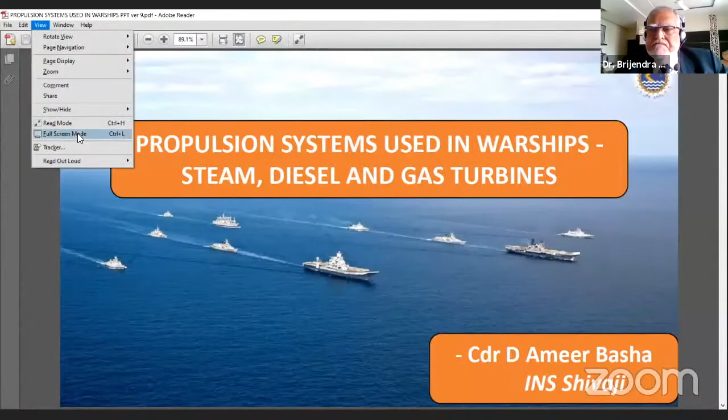Over the next 15 minutes, I'll be giving a brief presentation on propulsion systems used in warships, namely steam, diesel, and gas turbine.

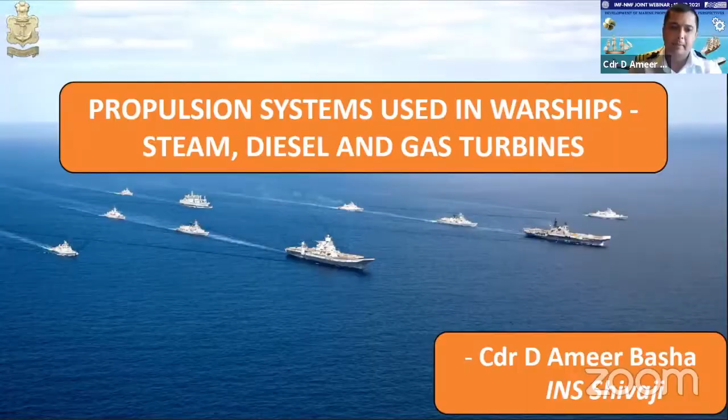The scope of the presentation is as shown on the screen. After giving a brief introduction on the subject, an overview and history of steam, diesel, and gas turbine propulsion in the Indian Navy will be covered prior to concluding the presentation.

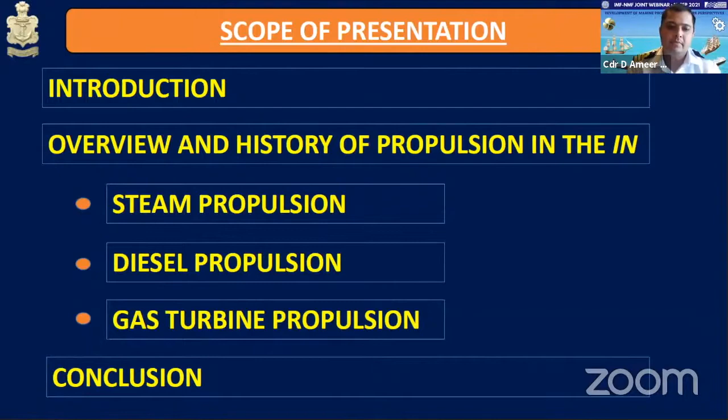With every height scaled in the progress of technology, man has always thirsted for more. The Indian Navy too has witnessed a phenomenal growth in marine engineering technology over the years, from reciprocating steam engines of 1947 to the diesel engines and gas turbines of today.

Needless to say, it has been an eventful journey for the band of marine engineers, a saga of growth and success which has empowered the Indian Navy to share stage with the best in the world.

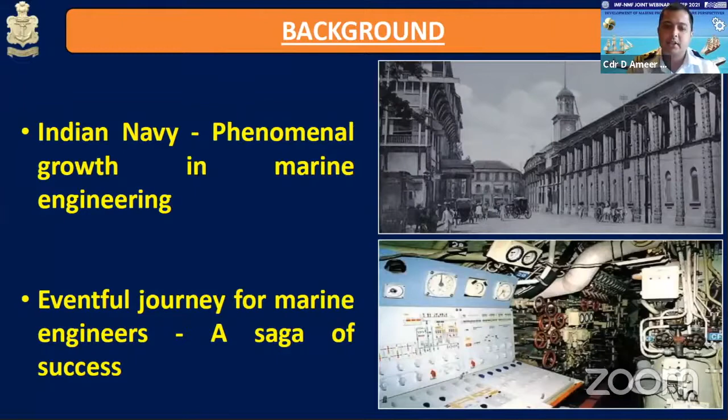Being a peninsular country, India has always had immense interest in the seas, and our maritime traditions span over 4,000 years. Indians have engaged in seaborne trade and cultural exchanges for many centuries. However, when the European interest in our subcontinent began in the 14th century, Indian maritime prowess suffered debilitating setbacks.

The beginning of the 18th century saw the emergence of Kanhoji Angre, admiral of Chhatrapati Shivaji's Maratha fleet, whose name became a legend and whose exploits are written in letters of gold in the annals of naval history. Shivaji was a firm believer in the doctrine Jalameva Yasya Balameva Tasya, he who rules the seas is all powerful, which Kanhoji Angre put to practice.

Shipbuilding shifted from Surat to Bombay in the early 1700s. Lovji Nusserwanjee Wadia, ancestor of a long line of famous Parsi master builders of both naval and commercial ships, selected the site for the naval dockyard in Bombay. This naval dockyard, during the course of the next 100 years, proceeded to build more than 115 war vessels.

The Indian Navy evolved as a war-fighting service from the time the British arrived in India. After 3 centuries of fluctuating fortunes and several changes in nomenclature and roles, the Indian Navy metamorphosed into a composite unit in the mid-1950s. Since independence, the Indian Navy has operated a multitude of vessels and employed a wide range of engines, propulsion, and other systems.

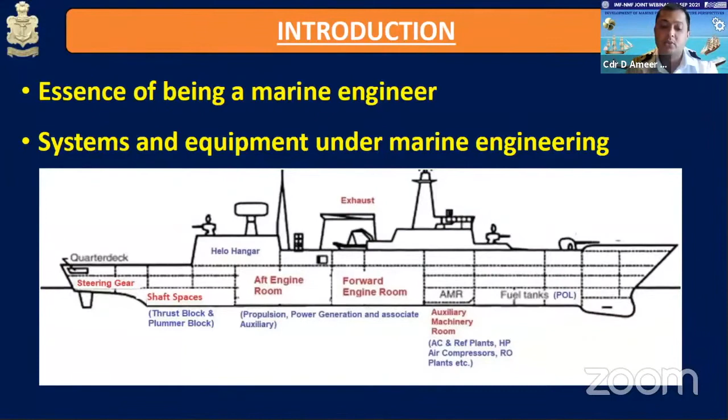Marine steam propulsion. The marine engineering technology that the Indian Navy inherited at the time of our independence was undoubtedly representative of the technology of those times, that is, steam propulsion.

In the context of ship propulsion, the end of the 19th century had heralded the initiation of reciprocating engine technology, which was borrowed from the railways. Steam engines are external combustion engines that perform mechanical work using steam as a working fluid and work on the Rankine cycle.

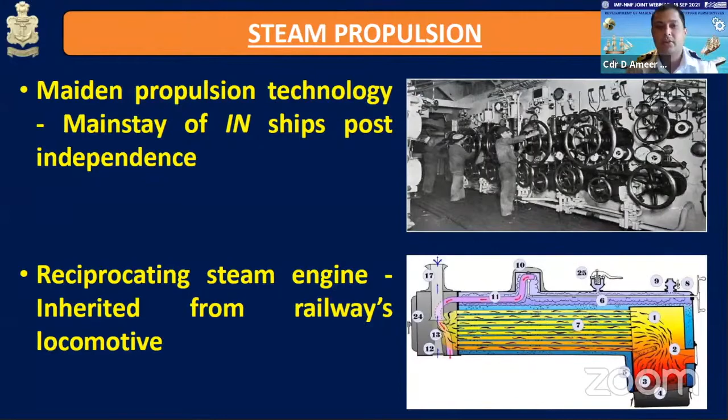Although steam power was not used until the 17th century, scientists had understood its potential for hundreds of years. The aeolipile, invented by the Greeks, used water vapor for motion as early as the 1st century AD. While there was no practical benefit of this device, it was the first example of experiments with steam power.

Greater developments took place with the invention of the first steam boiler in the 17th century. Although it was nothing more than a pressure cooker or a tea kettle, a series of key inventions followed one after another later from this point. In a short span of time, steam power was extensively used in railway locomotives, which led on to its usage for propulsion of ships, propelling them further and faster.

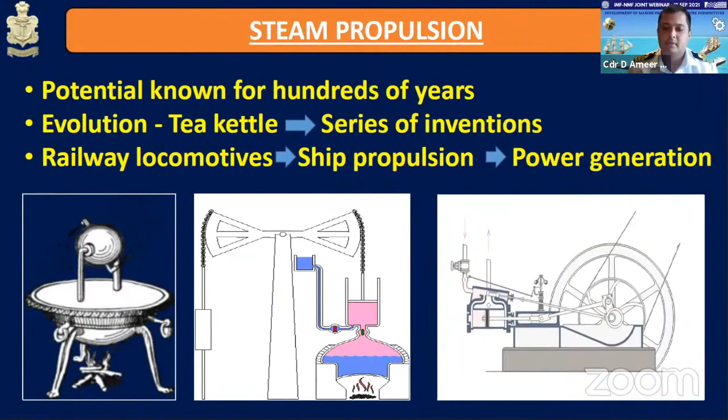Steam powers two types of engines, reciprocating and rotary turbine. The shaft power from each can be directly connected to the propeller or through some form of transmission through a gearbox. Reciprocating steam engines use the force produced by steam pressure to push a piston back and forth inside a cylinder. This pushing force can be transformed by a connecting rod and flywheel into rotational force for work. Reciprocating piston type steam engines were the dominant source of power for all auxiliary machinery on board warships.

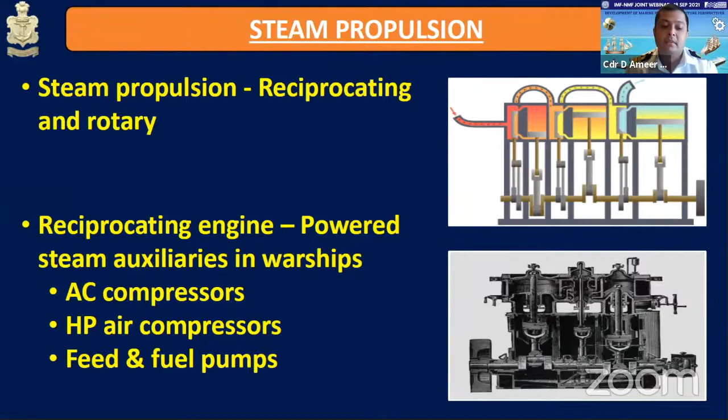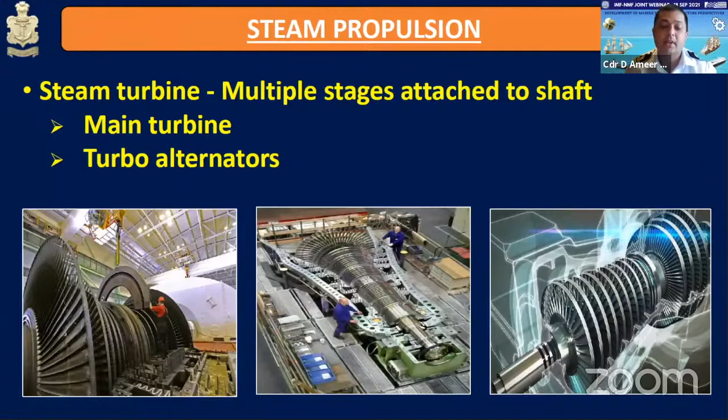A steam turbine is a rotary machine that extracts thermal energy from pressurized steam and uses it for mechanical work. It is a form of heat engine that derives much of its increased thermodynamic efficiency by using multi-stages consisting of blades attached radially to a spinning shaft for expansion of the steam. On steam-propelled Indian naval warships, steam turbines are the dominant source of power for main propulsion and power generation through turbo alternators.

The very first ship that was received from the United Kingdom was the Leander-class light cruiser of the Royal Navy, ex-HMNZS Achilles, commissioned as HMIS Delhi in July 1948, which was powered from the steam generated in 4 Admiralty 3-drum boilers. On 26 Jan 1950, with India becoming a republic, the Royal Indian Navy was renamed the Indian Navy, and the steam-propelled acquisitions included ex-Godavari, Gomati, Ganga, Khukri, Kirpan, Kuthar, Trishul, Talwar, and Mysore.

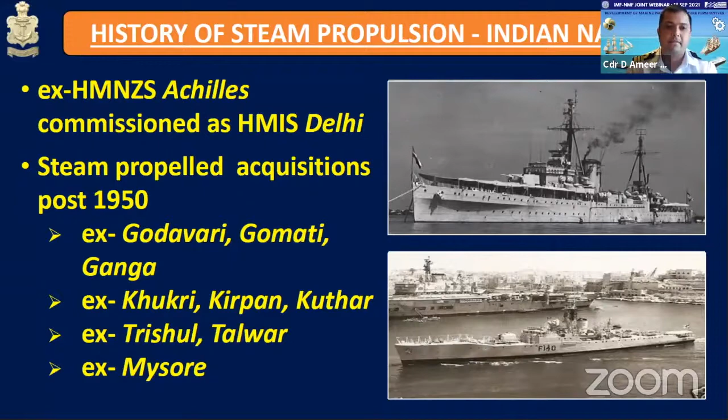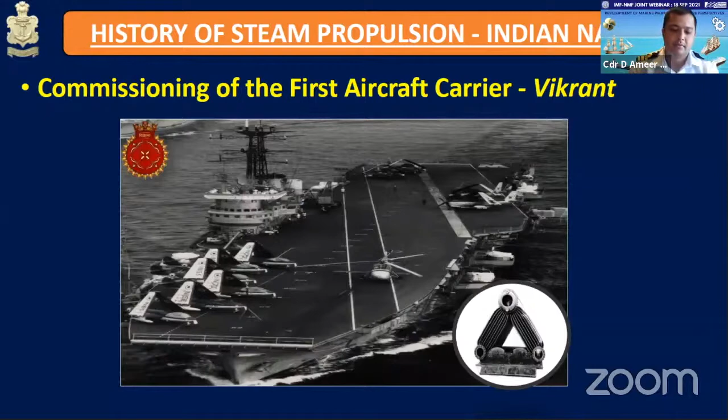As part of indigenous warship construction from 1970s to 2000, the steam propulsion plant was the mainstay of Indian Navy. Ships of the Nilgiri class, built at the Mazgaon docks from 1970s to 80s, were equipped with Y160 steam propulsion plants, consisting of 2 Babcock-Wilcox 2-drum integral short furnace boilers. This propulsion plant design was continued on Godavari and Brahmaputra classes of ships.

Y160 steam propulsion plants marked the beginning of indigenization and self-reliance, wherein the Boiler Erection Fabrication Center at Naval Dockyard, Bombay, developed the capability of erecting these boilers for main propulsion in-house.

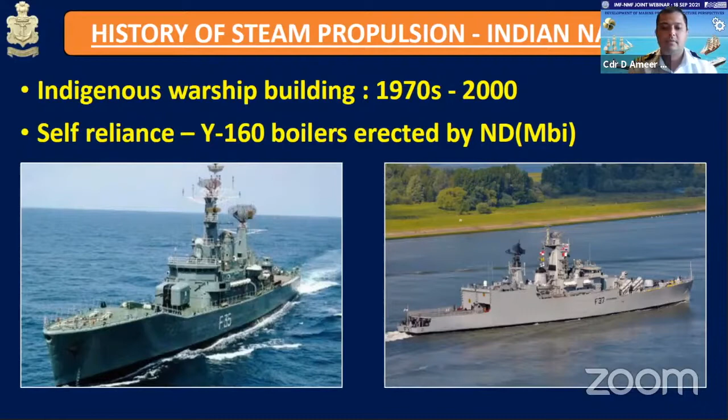The Indian Navy acquired its second aircraft carrier, INS Viraat, ex-HMS Hermes, from the Royal Navy, and after an extensive refit, commissioned it in 1987. Standard Admiralty 3-drum boilers propelled this 23,900-ton warship, which served the nation till 2017.

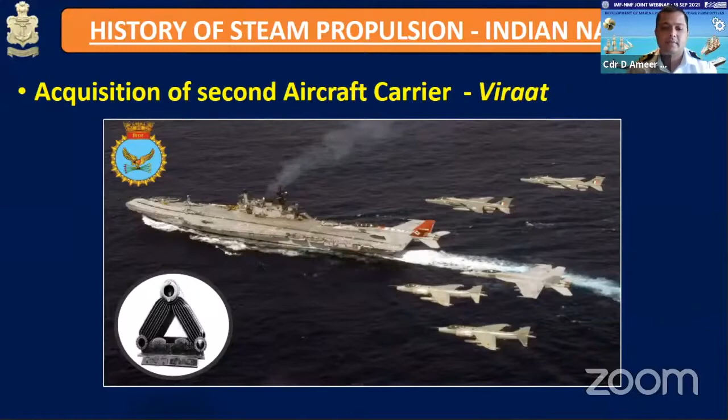Steam-propelled Indian naval ships of today include the aircraft carrier Vikramaditya, landing platform dock Jalashwa, and frigates of Godavari and Brahmaputra class. INS Vikramaditya is powered by 8 new generation Russian boilers, which produce a total power of 180,000 HP, driving 4 huge propellers. Each boiler generates 100 TPH of steam at a very high pressure of 64 bar against 30 bar in other existing steamships, including Godavari, Brahmaputra classes, and INS Jalashwa, fitted with indigenous and Western origin boilers respectively.

Indian Navy has thus developed expertise in operating indigenous, Russian, and Western origin boilers and would continue to operate them for at least next 30 years.

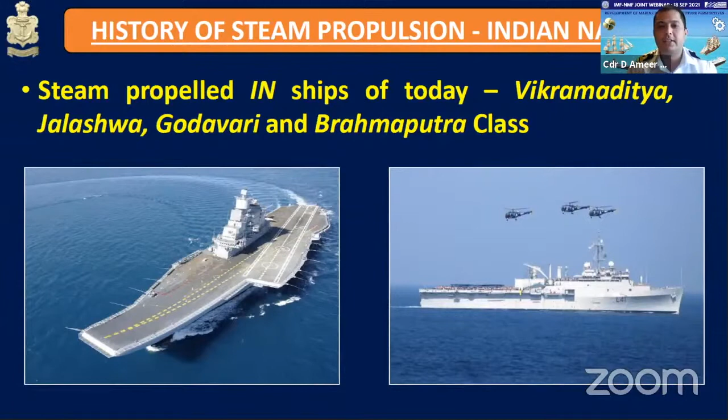Diesel propulsion. The prime consideration for shifting to diesel propulsion was the reduced size of the diesel engine, which resulted in an optimum power to weight ratio. The diesel engine is a compression ignition engine and has the highest thermal efficiency amongst any practical internal or external combustion engine due to its very high compression ratio.

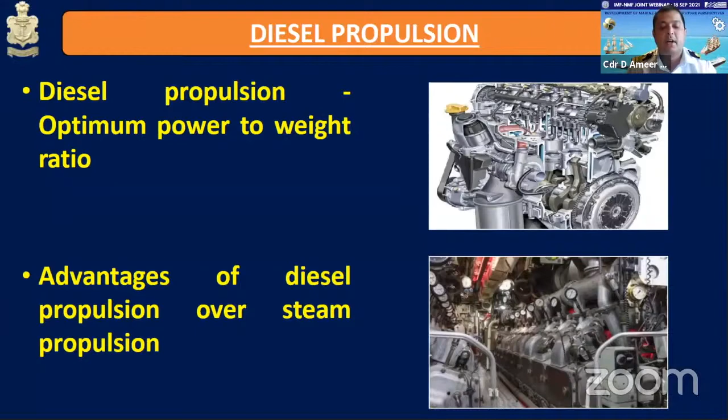Diesel engines may be designed as either two-stroke or four-stroke engines. They were originally used as a more efficient replacement for stationary steam engines. Since the 1910s, they have been used in submarines and ships. This marine propulsion technology coexisted with the steam technology that the Indian Navy inherited at the time of our independence.

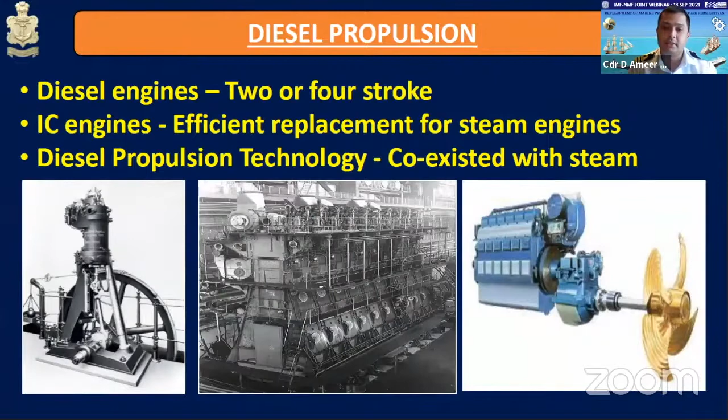Diesel-propelled acquisitions of Republic India included light tanker ship ex-Shakti, inshore minesweepers ex-Bassein and Bimlipatnam, coastal minesweepers ex-Karwar, Cannanore, Cuddalore, and Kakinada, anti-aircraft frigates ex-Brahmaputra, Beas, and Betwa, and seaward defense boats ex-Subhadra, Suvarna, and Sukanya.

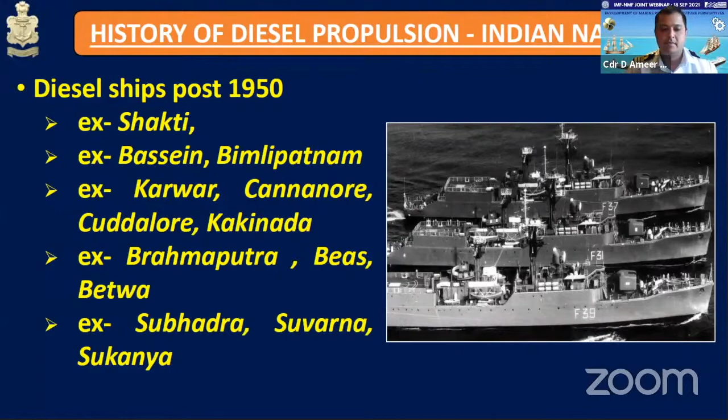The need for more power in less weight and space was always the main thrust of any propulsion package design. As a result, lightweight aluminum alloy radial engines of sophisticated and complex design used in aviation industry were marinized by the Russians and adapted for OSA class fast attack missile boats. These ships acquired by the Indian Navy became legendary when they were deployed with strategic brilliance to strike a lethal blow to the enemy's harbor in the 1971 war.

These compact aeroderivative high-speed engines called for specialized operator expertise and maintenance ability. Missile Boat Engine Repair Center of Naval Dockyard, Bombay, and the original equipment manufacturers jointly worked to make the operations more user-friendly. As a result, the radial engines became a major success story in the Navy.

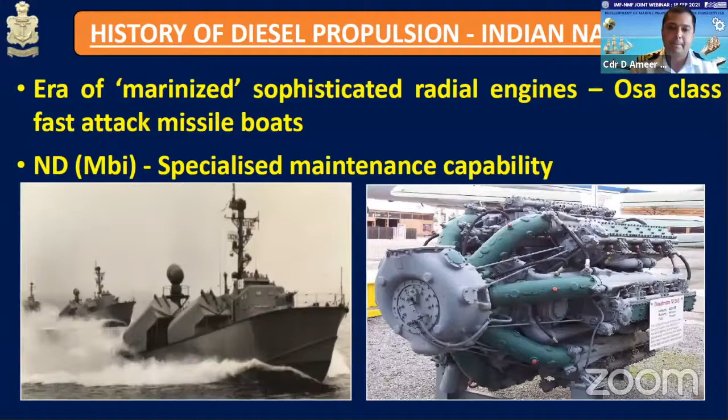Addition of new generation diesel engines to the Indian naval fleet happened with the acquisition of 5 Petya class of ships in 1968. The ships were fitted with unique Russian two-stroke opposed piston diesel engines. They worked on a two-stroke cycle and had 4 crankshafts. Following Petyas, Vijaydurg class of diesel propelled ships were acquired commencing 1976 with primary intention of coastal patrol and defense.

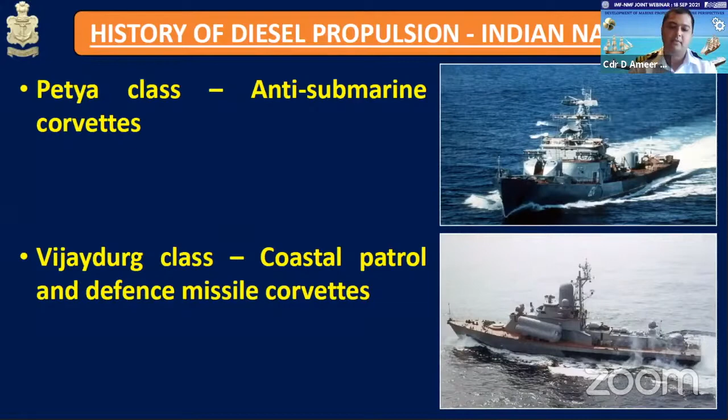In the 80s, when the Indian Navy was growing, the demand for more platforms to meet diverse operational requirements also grew. Diesel engines of different makes and designs found their way into the Navy during this period. The Pielstick PA series of diesels, taken up by Kirloskar Oil Engines Limited for indigenous production, were selected for the corvettes of the Indian Navy and represented a simple yet modern design.

The high-speed MTU engines, with a compact and lightweight design, have always remained favorite for small crafts. The large size, slow-speed MAN design diesels of the fleet tankers were a merchant marine type of engine introduced into the Navy for the first time.

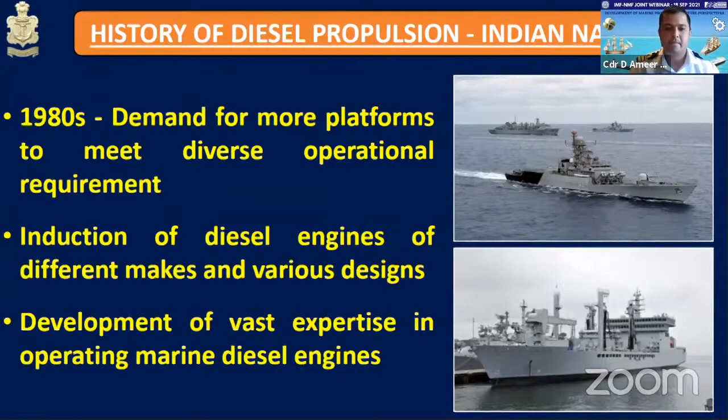Gas turbine propulsion.

A gas turbine, also called a combustion turbine, is a type of continuous internal combustion engine. The main elements common to all gas turbine engines are an upstream rotating gas compressor, a combustor, also known as combustion chamber, and a downstream turbine on the same shaft as the compressor. The basic operation of the gas turbine follows the Brayton cycle with air as the working fluid.

Atmospheric air flows through the compressor that brings it to a higher pressure. Energy is then added by spraying fuel into it and igniting it, so that the combustion generates a high temperature flow. This high temperature pressurized flow is repurposed for external work, such as rotating a second independent turbine known as a power turbine that is connected to a propeller.

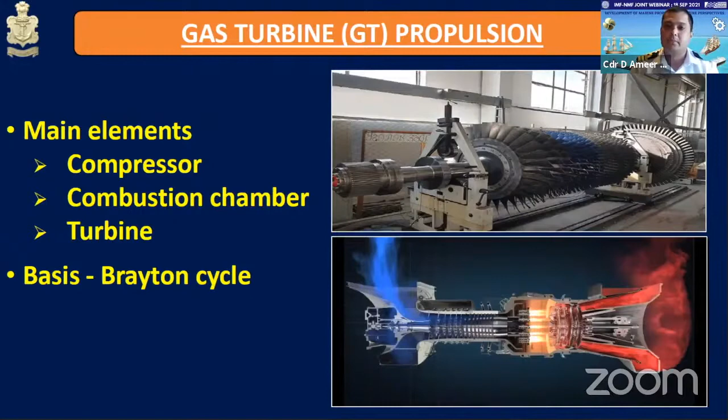Fitted on board the erstwhile Kamortas, the gas turbine, a radically new propulsion concept for the Indian Navy, was introduced in the 60s. The two M2 bay gas turbines, one each on the outer shafts, gave the ship awesome boost and propulsive power.

The induction of GTs received renewed thrust with the arrival of M3E Russian GTs on board Rajput class of ships in the 1980s. M3 GTs were rugged and reliable engineering equipment. In 1987, the Veer class of ships, 1241 REs, were inducted using M15E Russian propulsion systems. This GT was reversible, and the unique layout showed how a GT could be adapted in a confined space of a small vessel.

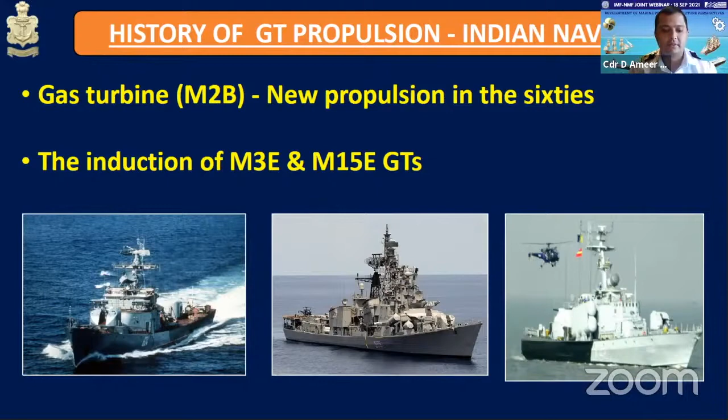The idea of creating an in-house composite and self-contained marine gas turbine overhaul facility, manned entirely by service personnel, to cater for gas turbines and gas turbine generators and future acquisitions, was conceived in the early 80s. The first overhauled gas turbine, M3E, rolled out of the portals of this unique facility in August 1995 and was installed on board INS Ranveer.

The first indigenously overhauled gas turbine generator prime mover underwent successful testbed trials in December 1996. This establishment, which was commissioned as Indian Naval Ship Eksila on 26 August 2000, today has a cumulative experience of overhauling more than 66 gas turbines and gas turbine generators.

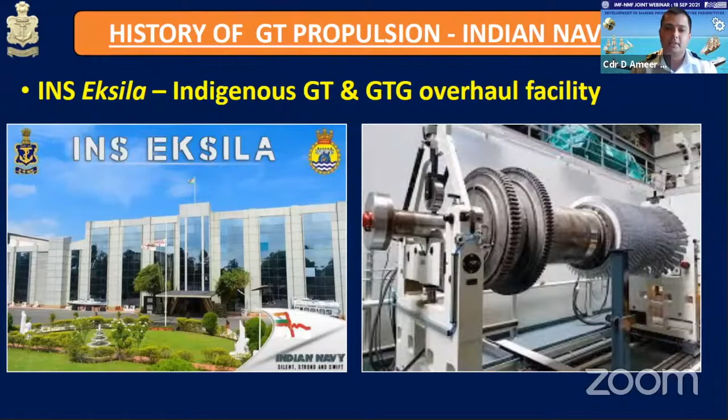Another remarkable achievement during the 90s was the indigenously designed and built state-of-the-art destroyers, the Delhi class of ships, which were constructed at Mazgaon Dock Limited and were the first gas turbine propelled ships designed by the Indian Navy.

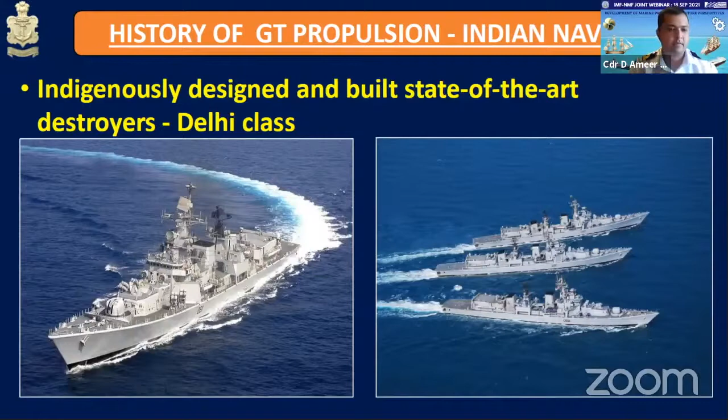A remarkable technology assimilation has taken place in the Indian Navy in a reasonably short span of one generation of marine engineer officers in the gas turbine field. The expertise and confidence in maintenance and operation of gas turbines today in the Indian Navy is at par with the most advanced navies. Today, the GT are the front runner of main propulsion and power generation on major Indian naval ships.

Although certain important gas turbine technology areas, such as blade design, gas flow path, matching of spool, etc., are yet to be mastered in India, and indigenous industrial support in this area of technology is minimal, a commendable task has been performed by the Navy to build up its own expertise on maintenance and operation.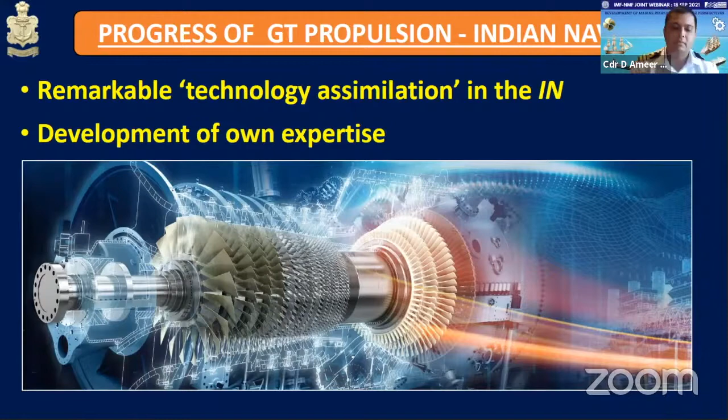Commander Basha, if you could expedite, please. Yes.

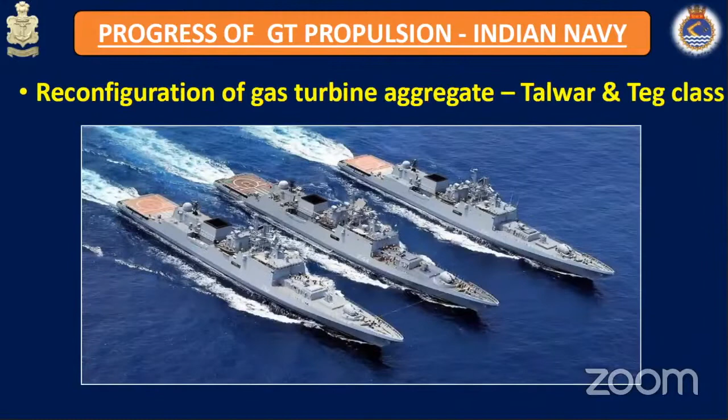The Project 17 frigates, the Indian Navy's Shivalik class. These ships have a combined diesel or gas turbine propulsion plant featuring two LM2500 marine gas turbines and two Kirloskar-Pielstick diesel engines.

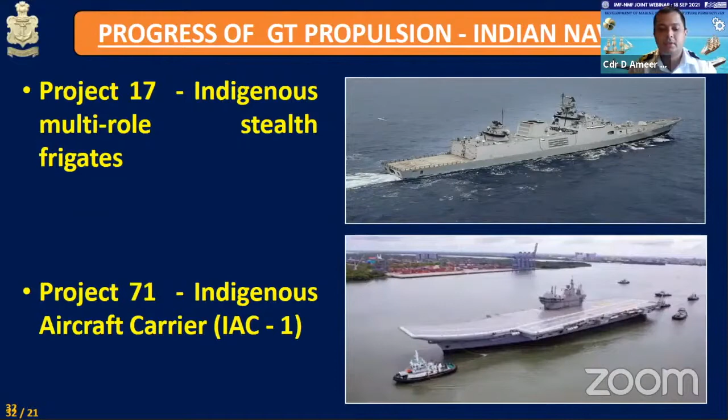Construction of the new indigenous aircraft carrier has been completed and the ship is under trials at Cochin Shipyard Limited. This vessel is powered by four HAL LM2500 gas turbines driving two shafts. It is a remarkable platform and an extremely challenging experience for the next generation of marine engineer officers of the Indian Navy.

The technological journey for the marine engineers effectively started from the first cruiser INS Delhi, a battle-worn ship handed on from the Royal Navy. The road traveled by the marine engineers from the pre-war machineries to today's state-of-the-art ship has not been an easy one.

Technologies that the marine engineers encountered over the years have been diverse in type and source, and the diversity has also truly been in extremes. Managing such diversity, especially in the absence of any active support from the Indian industry, has posed immense challenges. It is to the credit of the Indian Navy's marine engineers that with imagination, ingenuity, instinct, and improvisation, service and availability of the equipment and systems were consistently ensured.

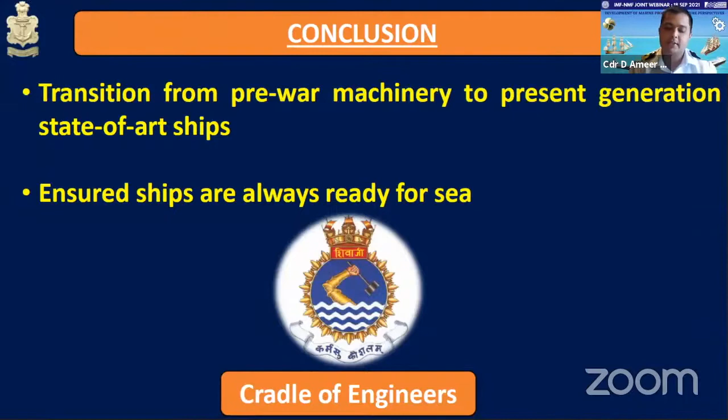We can say with pride that barring the rarest of rare occasions, the main engines have always been ready for sea.

With this, I'm finished with my presentation, sir. The house is now open for discussion.

Thank you very much, Commander Basha. An excellent presentation, and it's so very enlightening, especially for the people who are from the merchant marine here. It is so nice to see the initiatives taken by the Indian Navy in indigenization and the use of alternate materials, those kind of things. So wonderful to see various developments and the variety of propulsion mechanisms and systems available, and the kind of experience provided to the marine engineers in Indian Navy. So compliments to you, Commander Basha, and I don't see any questions.

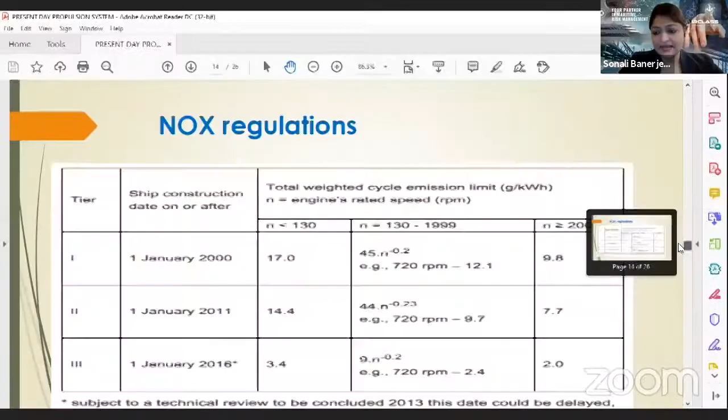So I would be discussing what criteria actually get into the selection of a propulsion system. As already spoken about, it is not just about the successful movement of the ship from point A to point B, but there is far more which goes into the selection of the prime mover for a ship, and the kind of propeller and drive unit we are going to have. First, navigation safety and the technical feasibility associated with that choice. Reliability, of course - when we make a choice of a marine propulsion system, the prime mover, there are huge commercials at stake, and reliability with respect to taking the cargo from point A to point B and meeting environmental regulations is one of the key challenges. Cost effectiveness, that goes without saying - economic viability is very important.

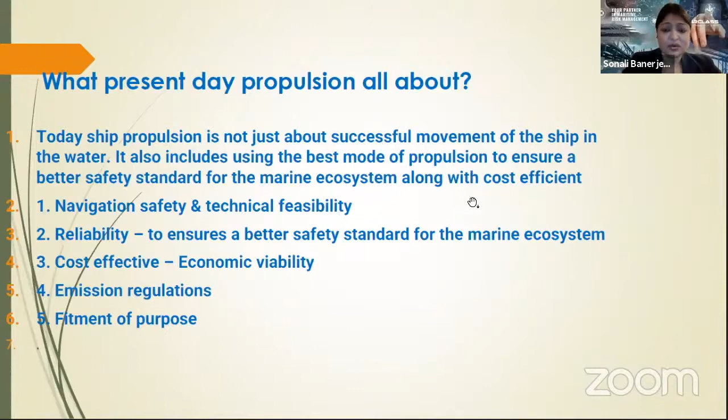Then we have the emission regulations and the fitment of purpose. Some vessels, for example a dynamic positioning vessel, require fine tuning with respect to maneuverability, because a lot of offshore structures have divers working at the bottom of those structures in the offshore. So this fine tuning with respect to navigability is very important, and those kinds of things go into the fitment of purpose.

We also have a category of floating vessels that are non-propelled, which would typically be like barges, pontoons, accommodation barges, which accommodate special personnel working at particular sites, say pipeline units or offshore structures, and also engaged in research, oceanography, etc.

So the topic today would be primarily discussing the propelled ships. The propulsion system would depend on the type of ship and the trade they are engaged in. They can broadly be classified into four categories: conventional big oil tankers, bulk carriers, container ships and other cargo ships; LNG ships; offshore supply vessels and vessels dealing in offshore operations; and small commercial vessels.

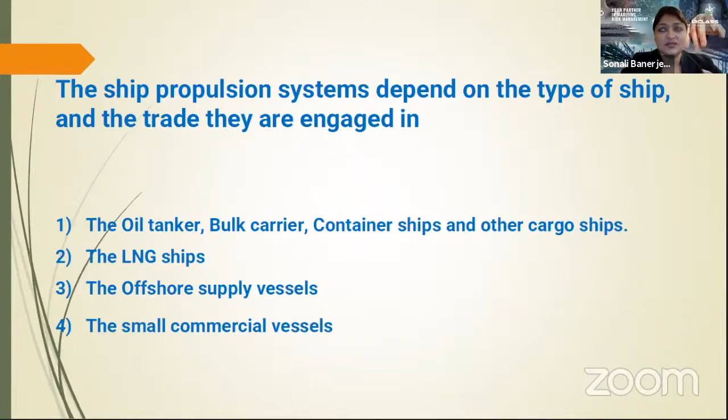Coming to the first one, the oil tankers, bulk carriers, and container ships - the main criteria for choosing this kind of propulsion system is that they should be able to carry huge volumes of cargo, propel at a speed of say 12 to 15 knots, and the container ships may go up to 24 to 30 knots. A higher power by weight ratio is needed.

By power by weight ratio I mean the power that is being generated versus the space and weight being carried. Because the heavier the engine gets, that makes up for some volume of cargo that has to be taken off. So it's important to have a higher power by weight ratio, and also the number of power strokes per complete cycle, meaning the choice of a 4-stroke or 2-stroke engine for these kinds of ships.

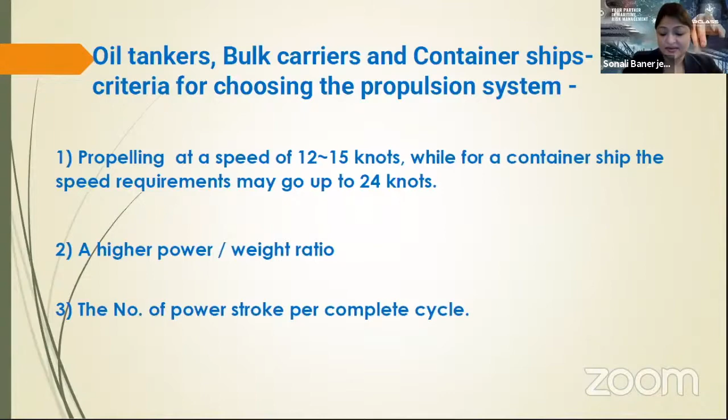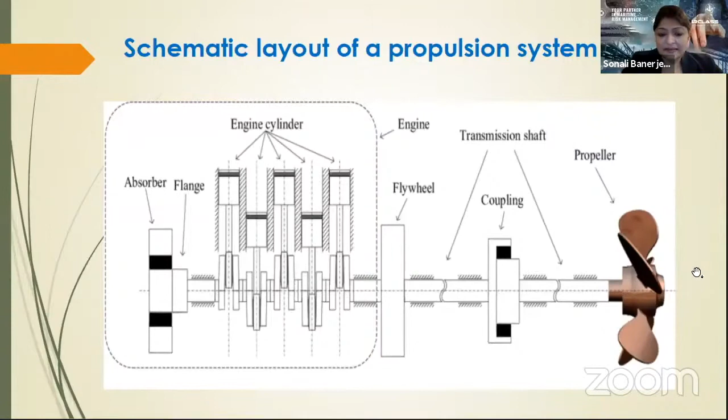So the conventional system for huge ships would be a long stroke or super long stroke, slow speed, 2-stroke marine diesel engine. Most modern ships use a reciprocating diesel engine as the prime mover due to their operational simplicity, robustness, fuel economy, and ease of maintenance.

The rotating crankshaft can be directly coupled to the propeller with slow speed engines, or sometimes with the help of a reduction gear for medium or high speed engines, and by an alternator in the case of diesel electric propulsion units. Intelligent engines have already been covered vastly, so I will not be discussing much upon that.

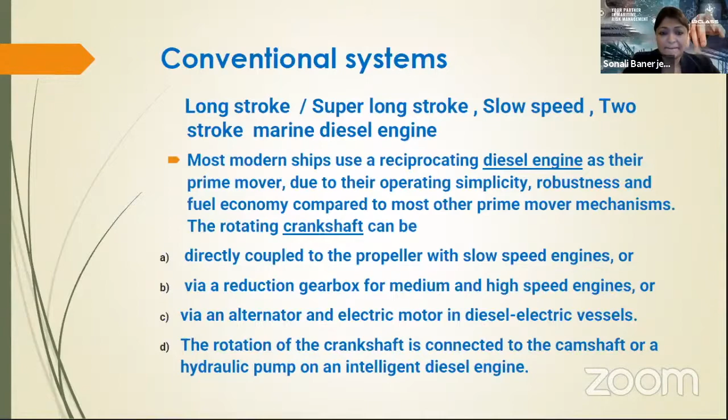Moving on to the next category of ships, towards the evolution of the LNG ships. One of the greatest challenges faced by people operating LNG ships was the complexity of cargo boil-off and how to manage it. This was the grounds on which the evolution of LNG ships developed.

Boil-off was initially used in a boiler to generate steam, which would drive the main propulsion via a steam engine or steam turbine. However, the efficiency for such systems was not very high, so there was a constant need for this technology to keep evolving. It improved with ultra superheated steam turbines giving better economy and efficiency, and thereafter came today's hero: the dual fuel technologies.

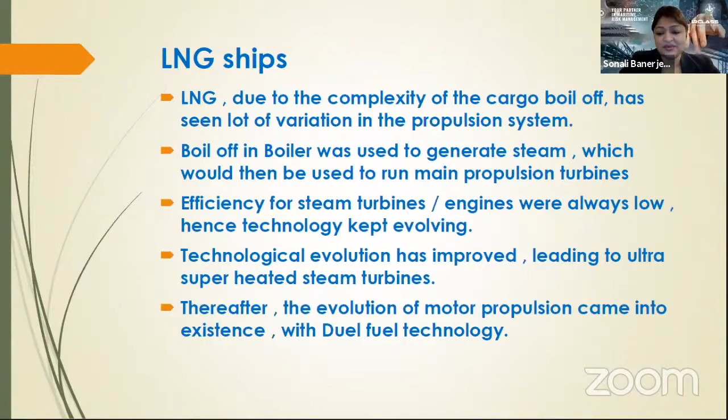A simple schematic layout of a dual fuel engine on an LNG ship: these are the gensets, the red line depicts distillate fuel, and TFDEs are also being used, meaning heavy oil, distillate oil, and boil-off from the cargo plant. This would typically be a cargo tank, and the boil-off gas comes here. There's a compressor, then a heater, and with the help of this heater, the boil-off gas is injected along with the distillate fuel and burnt here. Then we have this genset connecting power to the main bus bar.

Similarly, the same is used in a boiler, which would in turn drive the turbine, which can be used with the help of a fixed pitch or controlled pitch propeller.

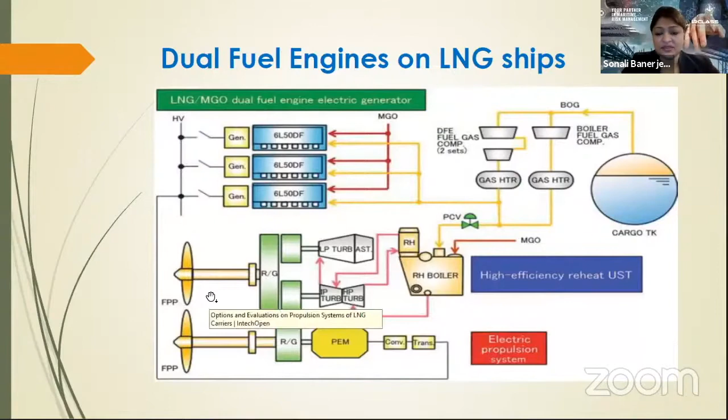That's exactly what we saw: the dual fuel diesel electric propulsion. These ships were fitted with a partial reliquefaction plant, and the generators were capable of operating on dual fuel as well as HFO. The ones using HFO, distillate fuel, and boil-off gas would be called the TFDE, that is the tri-fuel diesel electric propulsion.

The generated power would then be utilized to drive a big synchronous motor, which would generally drive a CPP, because the power requirement can be varied with the help of a controlled pitch propeller, and in some cases fixed pitch propellers.

Thereafter, the MEGI engines of MAN B&W combined the main engine to be able to burn fuel as well as boil-off cargo. However, the big constraint faced in this case was that these engines required high capacity boosters, almost to the extent of 350 bar pressure, to be injected into the engines.

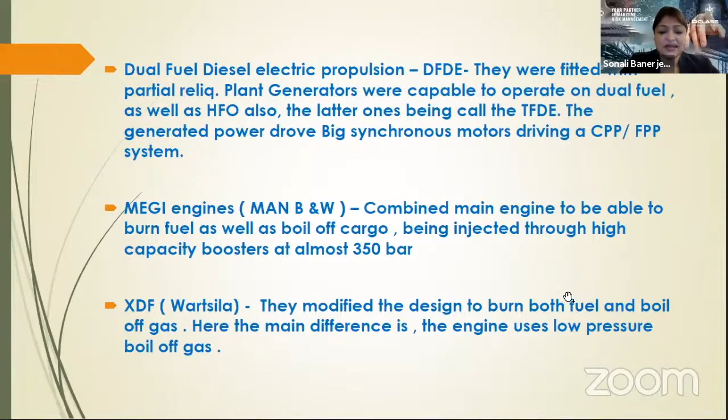This was simplified with another version, the XDF from Wärtsilä, where they modified the design to burn both fuel and boil-off gas. However, they required a lower pressure boil-off gas injection, so the industry opinion has been that this is generally getting more popular.

Coming next, I would be discussing very briefly the schematic layout of a diesel electric propulsion system. These kinds of systems are generally seen in offshore vessels and cruise ships.

As mentioned earlier, while operating in offshore structures, fine tuning is very important because the dynamic position vessel's ability to hold position is critical under various wind and weather conditions. For cruise ships, these are a popular choice because they generally have less noise and vibration, and the comfort of passengers is a big criteria in choosing the propulsion system.

Here they would have huge gensets generating big power connected to the main bus bar, and from this bus bar they would drive big motors which drive the propulsion unit, thruster units, stern thruster, bow thruster, whatever combination is required for, say, dynamic positioning.

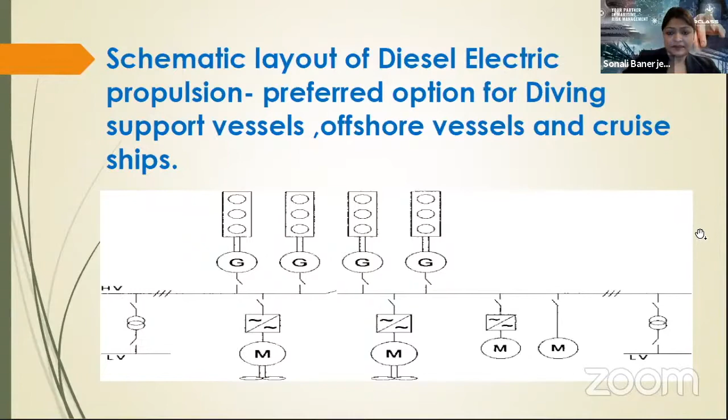Other commercial vessels have many combinations, but a few I've included here: water jet propulsions, which are used in small high-speed crafts, and directional propellers or Z-pellers, as they're popularly called, used by anchor handling tugs or tugs. In this case, the propeller is able to move from one direction to the other, and accordingly the purpose of the rudder is also met out in this manner.

Thruster units for high precision offshore operations, as for example diving support vessels, and coming technologies in renewable energy and wind power.

So finally, we are eventually aiming for a situation where we may be able to become fuel free and are able to utilize renewable energy and wind power.

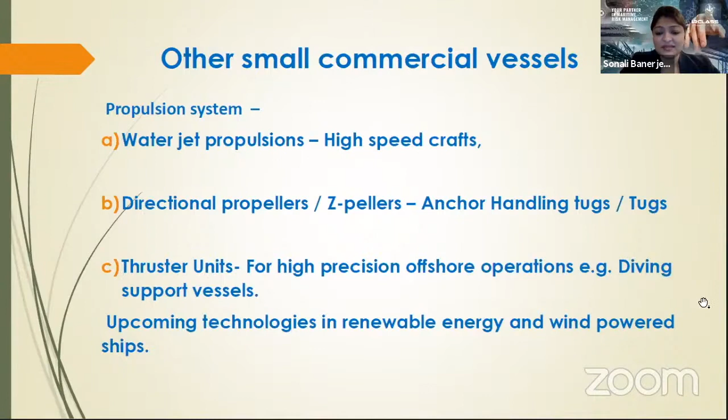Next, we come to the environmental regulations. Primary concerns that we have when we talk of environmental regulations are the NOx regulations, the SOx, and the carbon emissions and particulate matters.

Coming to tier 3, this would be applicable on ships which are in emission controlled areas.

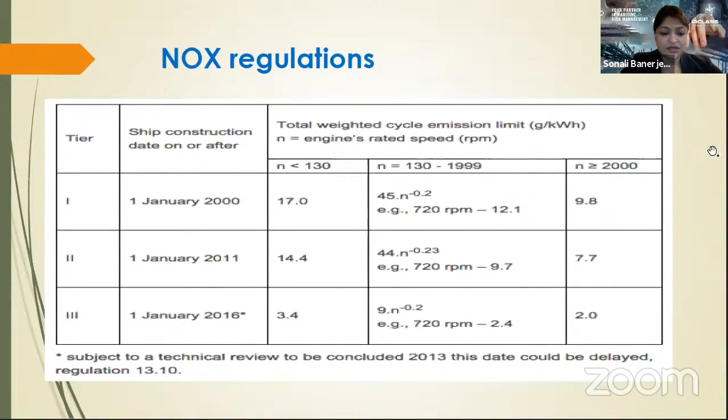Coming next would be sulfur regulations. We all know that since last year, the sulfur regulations have taken the industry by storm. Here is a graphical presentation where on the Y scale we have the sulfur percentile, and on the X-axis we have the years in which they were entered into force with that percentage of sulfur.

If we go by the worldwide pattern, initially it was 4.5%, which came down in the year 2012 to 3.5%. Then further it was brought down from 1st January 2020, when it came down to 0.5%.

For vessels operating in emission controlled areas, the first reduction from 1.5 to 1 was experienced between 2010 and 2011, which was further reduced in the year 2015 to 0.1%, and after that it has been steady. The EU ports, of course, they have been operating at 0.1% since.

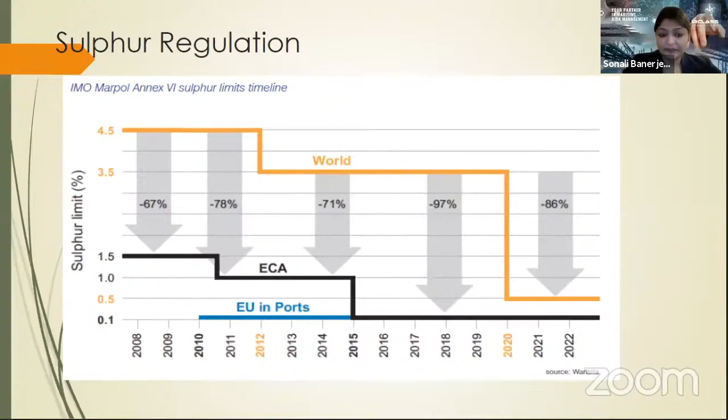A lot of vessels in the main fleet of foreign-going vessels have been installed with the exhaust gas cleaning system to enable them to burn conventional high sulfur fuel with the cleaning system. So the EGCS installations would need to comply with the MEPC resolution 259/68.

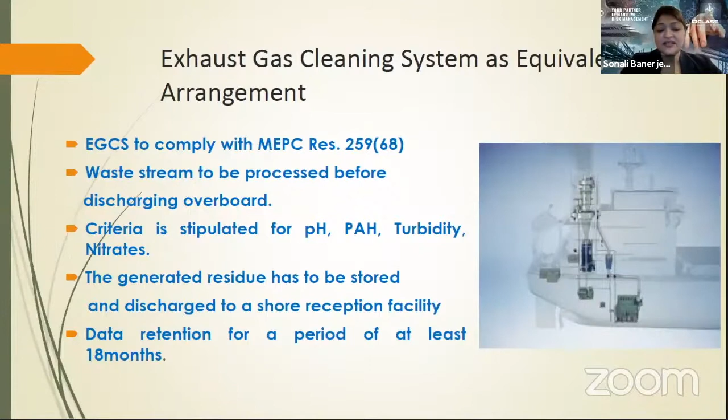One big concern here was that the wash water stream had to be processed, and it was important that the wash water meets the discharge criteria before being discharged overboard. This criteria is in terms of the acidity, the turbidity, and the nitrates involved. The generated effluent or residue has to be stored and discharged to a shore reception facility, and the data retention required is for a period of at least 18 months.

Now we're coming to a topic which is getting very sensitive, and the industry definitely is embracing it because everybody is talking and we want our future generations to live in a pollution-free environment. So IMO, with the greenhouse gas reduction strategy and the levels of ambition, we will be discussing briefly in this.

First I would be discussing the carbon intensity of the ship, which was used to decline that greenhouse gas emission - that is the EEDI. The EEDI is applicable for new ships. When we say new ships, we mean ships constructed after 2013. This kind of EEDI would be applied to vessels after 13, and they would be using the pre-sea trial data performance which was done along with the EEDI certification.

The next would be the EEXI. EEXI would be applicable to ships in the pre-EEDI era. When we talk of pre-EEDI era, a lot of these ships are the type from which data is not available, and records may be difficult to retrieve. But with the incoming of EEXI, the trial documents that were available, and the engine load and sea trial graphs, would be utilized for evaluation.

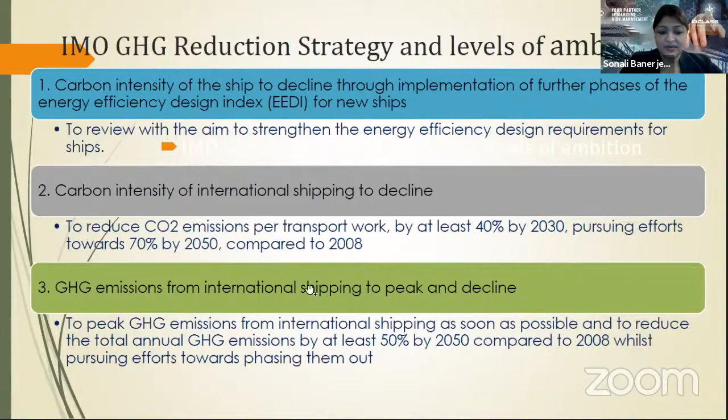As stated in serial number 1 of the previous slide, MEPC 75 adopted the phase 3 timelines and reduction rates pertaining to the Energy Efficiency Design Index - that was for the new ships, discussed at MEPC 75. Towards serial number 2 and 3, that is the EEXI, which talks about technical measures to control the energy efficiency of the vessel, and the operational measures brought forth by the CII, which were adopted in MEPC 76.

Here they also discussed alternative fuels and net zero carbon fuel, which produces no greenhouse gas emissions or carbon footprint.

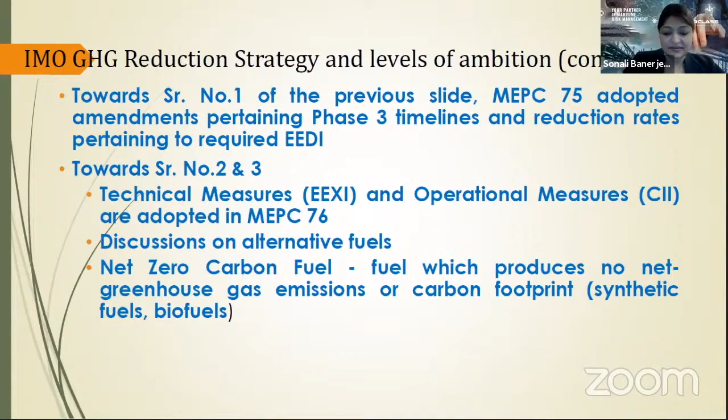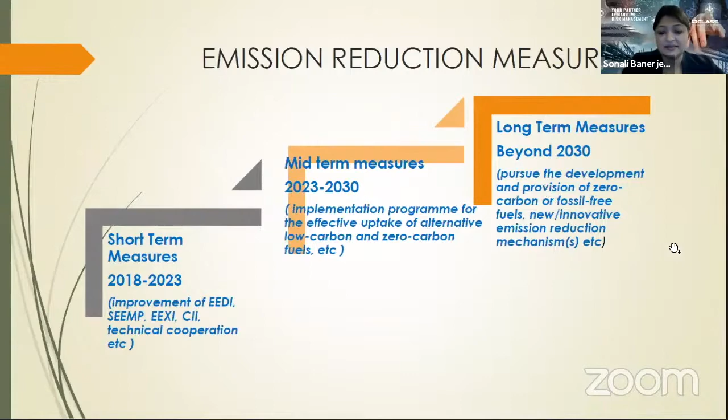Just briefly touching upon the EEXI regulation. It is a technical measure of the ship's energy efficiency, measured in terms of carbon dioxide CO2 grams per ton per nautical mile. This is stated in MARPOL Annex 6, Regulation 23 and 25, and applies to ships of 400 GT and above engaged on international voyage.

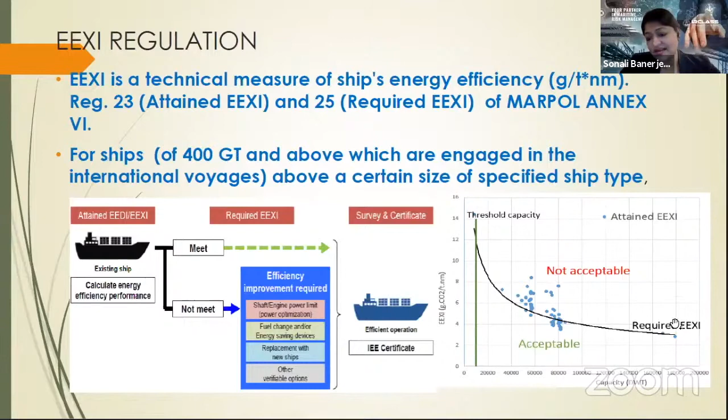Sir, I will just try to shorten this. This graph talks about how the higher the dead weight, the lower the required EEXI. As for attained EEDIs, I will be skipping this because it's more about the implementation plan.

In case, after preliminary calculation, it is found that the attained EEXI of the vessel is more than the required EEXI, then we will have to present and submit a suitable improvement plan. Proposals have to be given to the flag state, based on which they will have to evaluate after the determined time.

The last thing I would like to mention is that a solution often used for improving the attained EEXI is engine power limitation. However, some other technical measures used to improve energy efficiency include fitting an optimized bulbous bow and propeller boss cap fins. The propeller boss cap fin is typically an energy-saving device attached to the propeller of a vessel. It breaks up the hub vortex generated behind the rotating propeller, resulting in energy savings of approximately 3 to 5% compared to an identical regular propeller. It can be installed on a CPP or even a fixed pitch propeller.

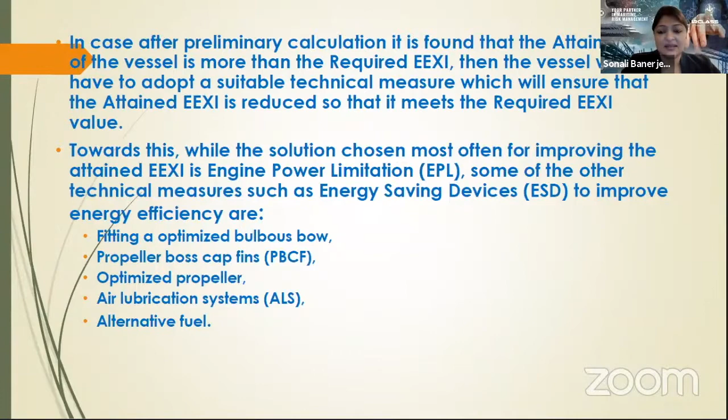The optimization of the bulbous bow would typically be designed for high speed and specific loading conditions. But now they're also looking at design conditions incorporating a huge bandwidth to accommodate various operating conditions, so it may not give the best result only at the highest operating speed and loading condition, but across a range of conditions. Air lubrication systems basically inject air bubbles to reduce friction between the ship's hull and the seawater. These are the measures the industry is looking at.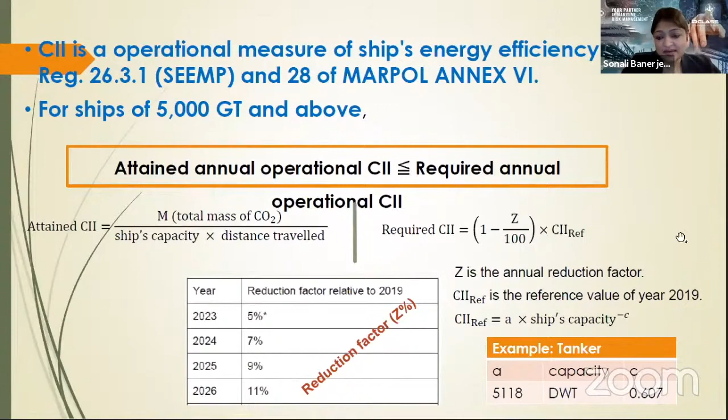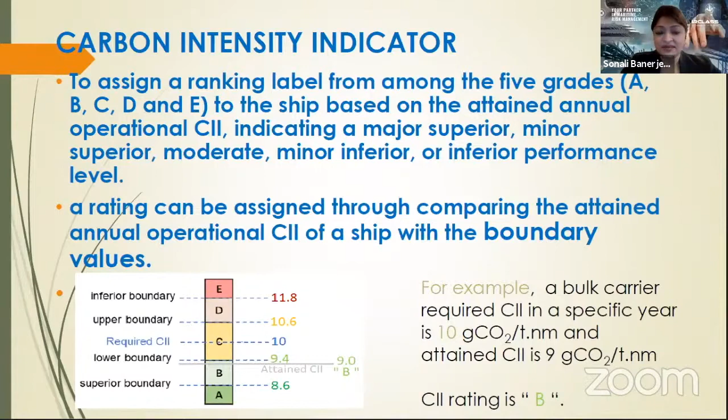So with that, I come to the end of my presentation. Based on these regulations, the conventional propulsion designs and fuels may not be adequate to meet the ambitious goals of IMO. So deliberations are still ongoing between the various flag states, industry leaders and the IMO as to how best the goal of a carbon-free environment can be achieved. That's all from me, thank you so much.

Thank you very much, Sonali. A very thorough and clear presentation.

The future for marine engineers is to be driven by the regulations and industry requirements, so there's a lot to be learned and a lot to be done.

There is one question: what is the full form of EEXI? Sonali, if you could type that in the chat for the benefit of everybody, and I will also describe what EEDI is. I saw Mr. Rai's hand raised, but we are short on time, so I'm sure Admiral Nadkarni will give us time to revisit some of these questions.